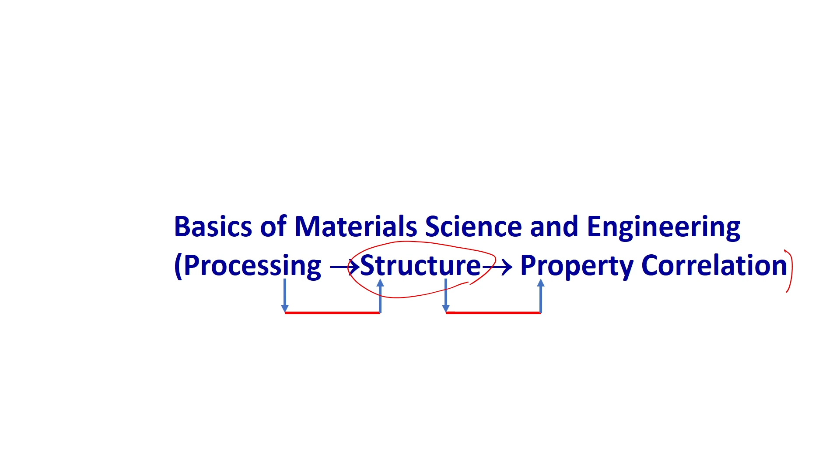So, the basics of material science engineering is this correlation between processing, structure and properties. By processing it means the techniques which you use to make certain material. It can be simply liquid to solid, that is called casting. It can be deformation processing, it can be powder metallurgy, or it can be thin films. Many kinds of processing techniques are available in the literature, and each of these techniques has its own merits and demerits. Based on the processing technique, the microstructure or what you call a structure develops in the material, and this structure is what is important to determine the properties of the material.

So, therefore, we need to understand these connections, and you must be thinking why I am talking of these aspects in a course on machine learning and artificial intelligence. Well, at the end of this course, what you are going to do is to design materials, predict material properties. So, unless you know the basic aspects of those, how can you correlate them? There will be no correlation between the basics of materials engineering and the applications of AI/ML. That is why this needs to be done at the beginning of this course, so that you can actually understand it, and whenever you develop the various kinds of models for machine learning, you will be able to use these kinds of fundamental concepts and models.

So, the fundamental aspect is the correlation between structure and properties, as we have discussed. What is the meaning of structures? Structures can be atomic structures, crystal structures or microstructures. When you see any component which is available in the world, what you see is a macrostructure, how they look. But we can see even microstructures under a microscope. That is why it is called a microstructure. But if you still go down the dimensional scale, you can go to crystals and atomic pieces.

And what are the properties we are going to discuss? Obviously, mechanical properties, the most important, physical, magnetic, electronic, electrical properties. You can expect to get a full understanding of this correlation between the structure and the properties. That is the main objective of these things.

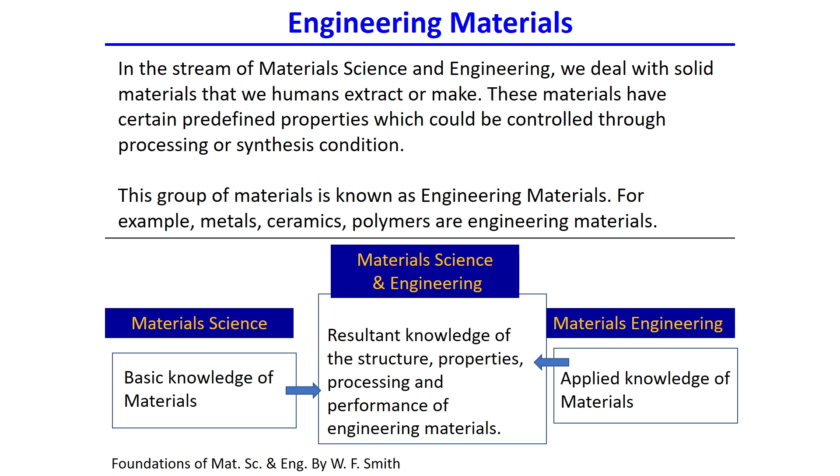Now, this has been done over the last 200 years or so, and most importantly in the last 100 years we saw a lot of engineering aspects come into the picture. So, we have to put it together in one basket, that is the idea. But first and foremost, I told you that in the materials world we have 4 different types: basically metals or alloys, ceramics, polymers and composites. Composites are mixtures of these 3, or of 2 of these 3.

And their chemistries are different, obviously everything is different, properties are different, and some of them have very distinct properties which are not available in other cases. Like in polymers, we have the ability to process very easily, which is the basic characteristic of polymers. That is why you see so many polymeric products in the market today.

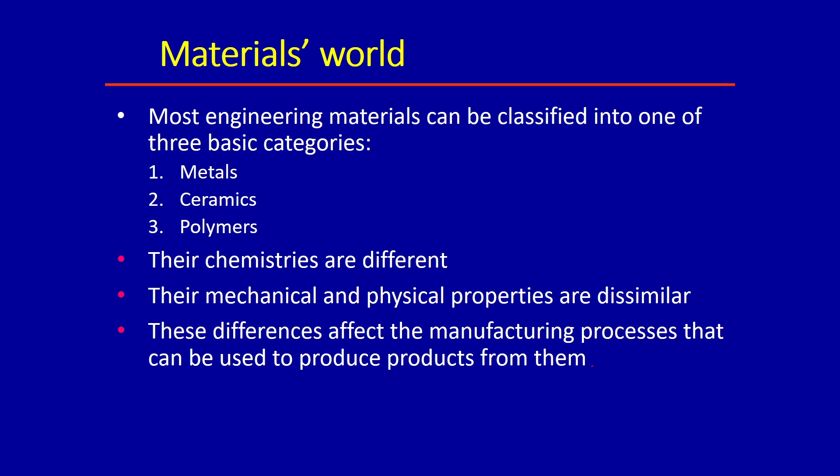But nonetheless, each of these species is very important. As far as the composites are concerned, they are easily available in the world. There are many natural composites available, we know that. The horn of a rhino is a composite, and that is why it is very strong. It is basically a nanocomposite, nanoparticles inside a polymeric material, a biopolymer, that is why it is so strong. And composites can be a mixture of any of these three: metal and ceramics, metal and polymer, and ceramics. We have discussed all of it.

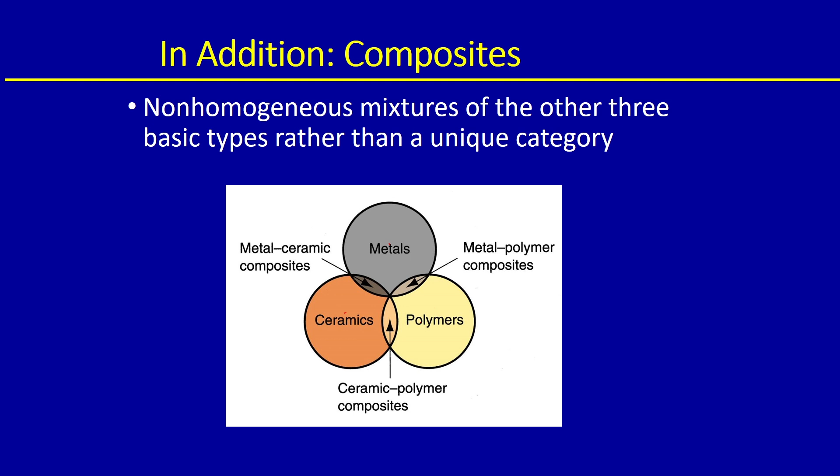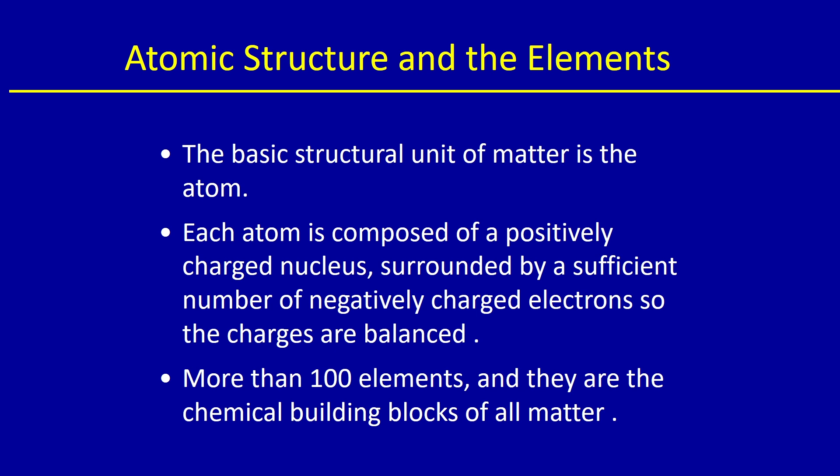So, the basic structure of material is the atom, that is where everything begins. If you want to understand electrical and magnetic properties, we have to go down into electronic structures, which we will see later. But at the beginning, it is important to know that the basic structure of material is the atom, and that is why in a periodic table we divide the elements in a very nice way.

I talked about it. On the left side you have metals, and in the central part you also have metals. You can see on the left side these are the metals, and the central part is also metal. On the right side you basically have metalloids or gases. Metalloids like germanium, silicon, arsenic, antimony, tellurium, bismuth are present on the right side.

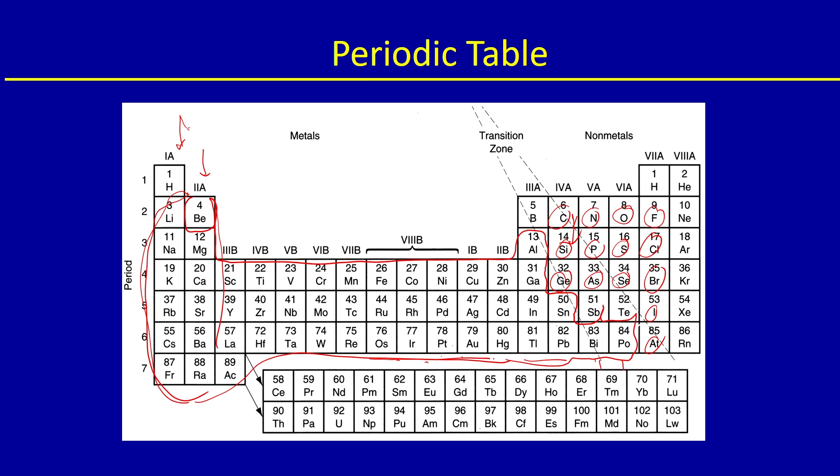And then you have gases like fluorine, chlorine, bromine. Bromine is a liquid, iodine is also present. But we also have oxygen, carbon, nitrogen, boron, phosphorus, sulfur present on the right side of this periodic table. And atoms are the basic building blocks.

Depending on how we arrange them, you can have two types of structures: crystalline and non-crystalline. In a crystalline structure, atoms are arranged in a very orderly manner, and in a non-crystalline structure atoms are arranged in a haphazard or random manner. We will talk about non-crystalline structure later.

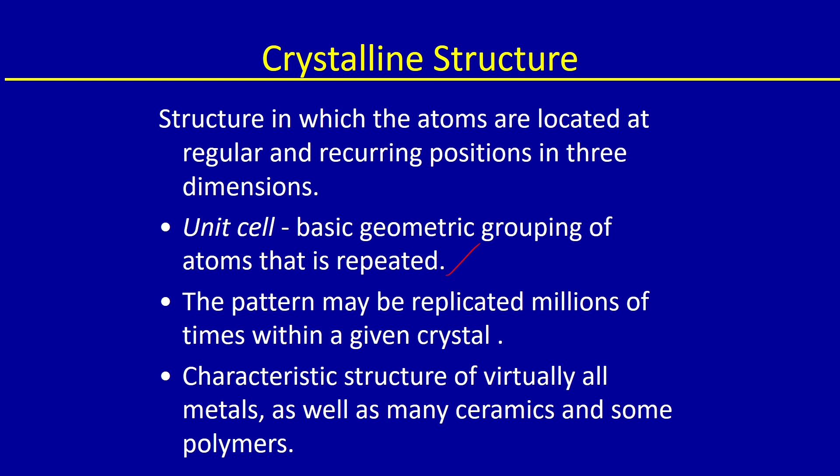So, when your atoms are arranged in a nicely regular recurring way in three-dimensional space, we need to know what is the unit which is getting repeated. That is the basic geometric group, and it is known as a unit cell. We already talked about it, and this pattern can be repeated millions of times in three-dimensional space. That gives you the whole crystal repeatability, and this is true for metals, ceramics, and also some of the polymers.

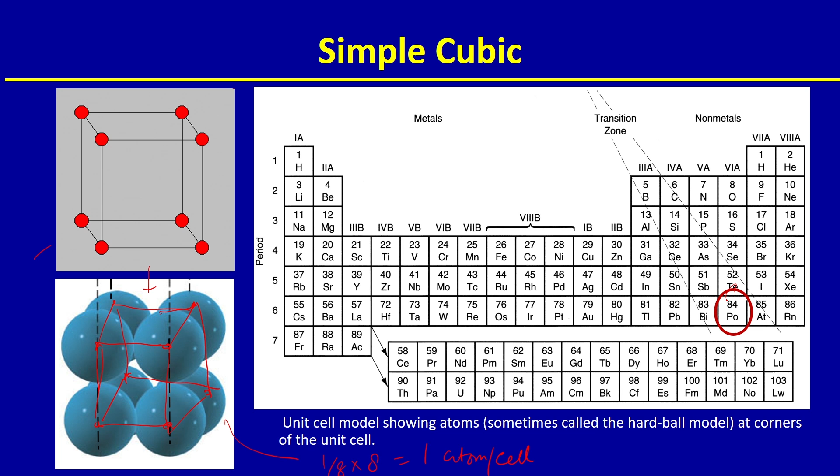The basic structures are divided into four different types. In a cubic system, there is simple cubic, with only one atom at each corner of the cube unit cell, and there is only one metal which shows this structure, called polonium. Then you can also have body centered cubic, face centered cubic, and diamond cubic structures.

Body centered cubic structures have, in addition to the corner atoms, an atom at the center of the unit cell. Face centered cubic structures have atoms at the faces of the unit cell. There are 6 faces, so there are 6 atoms in addition to the atoms at the corners. Diamond cubic is different. It has atoms at the corners of the cube, at the face centers, as well as at the tetrahedral voids within the unit cell.

We already talked about it, like this atom which is at a tetrahedral void. You can easily draw a tetrahedron like this, and within this tetrahedron you have this atom present. You can take away this tetrahedron very easily, and you can see that it forms a hole inside it, and inside it this atom exists. So, silicon, germanium or diamond have diamond cubic structures.

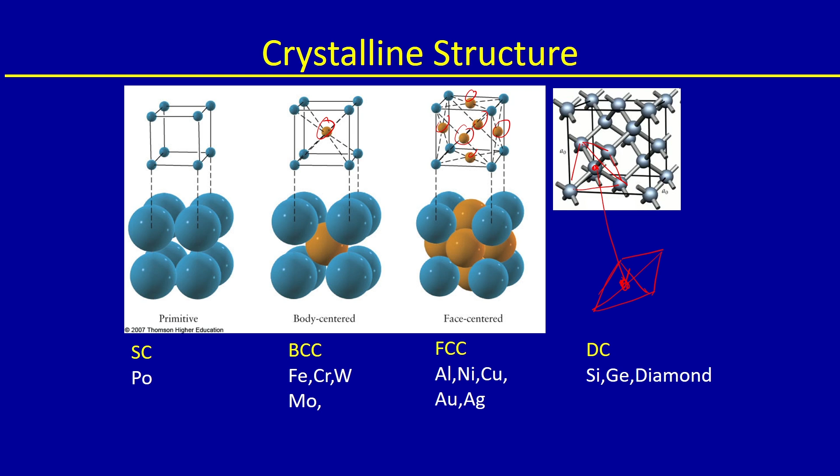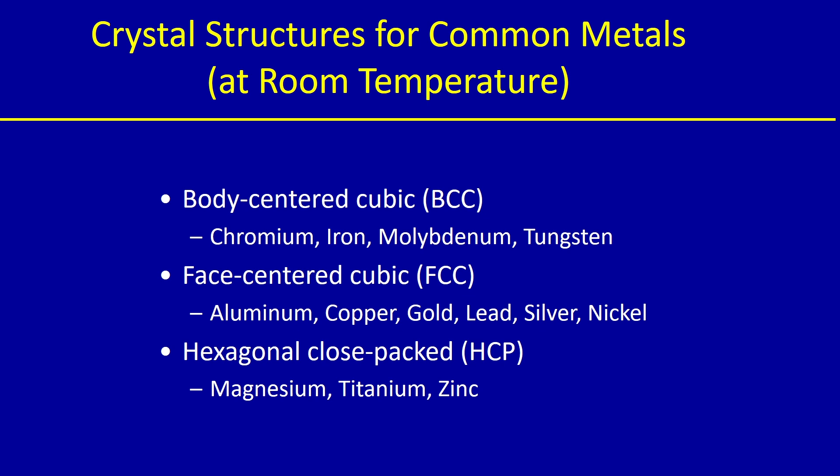You can also have hexagonal structures. Major examples I discussed are magnesium, titanium, zinc, and aluminum oxide, Al2O3, alumina. These are examples of different metals which form these crystal structures. BCC has chromium, iron, molybdenum, tungsten. Face centered cubic has aluminum, copper, and many important metals like gold, lead, silver, nickel. And hexagonal crystal structure is magnesium, titanium, zinc.

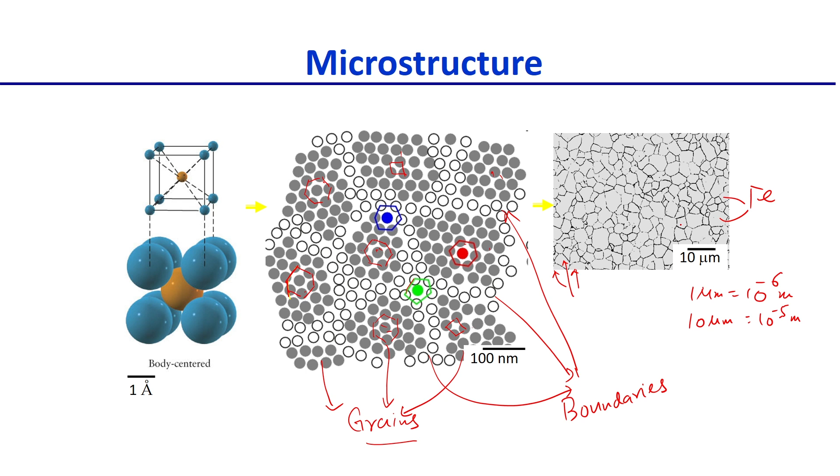So, once you arrange these crystals, you form microstructure. That is what is shown here. These are the different crystals, or they are called grains actually, and between two grains you have boundaries. And in an optical microscope you can see this kind of structure, shown on the right side, with iron grains and the boundaries shown by the lines or curves like that.

So, a microstructure can vary based on pure iron or steels, we know that. Pure iron has no other elements, but steel has about 0.8% or less of carbon, and this can lead to carbide. We basically have a mixture of iron plus carbide. That is why it forms a lamellar structure, consisting of parallel laths of iron and carbide Fe3C.

We always think of crystals as perfect, right, but nothing is perfect in this world, including human beings or us. So imperfection is invariably present in every material, and these imperfections have a very important role in determining the material properties, whether mechanical, physical, thermal, electrical, electronic or magnetic properties. These defects or imperfections will play a role, and imperfections can sometimes be introduced purposefully, or be present because of the processing by which these materials are made.

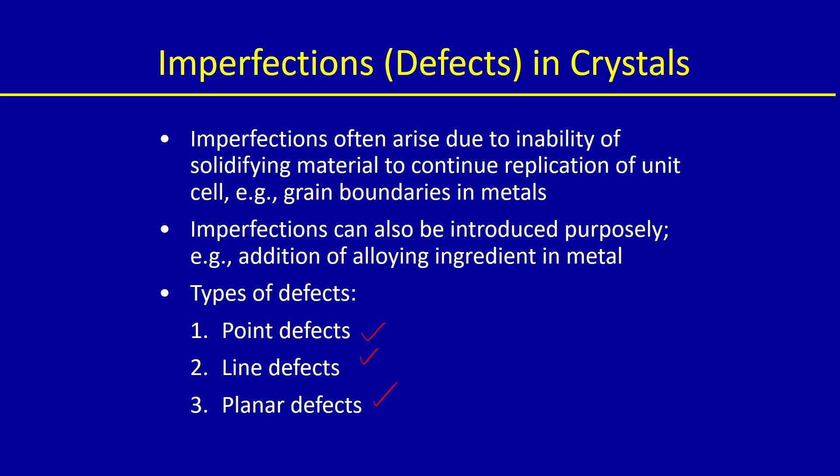So there are different types of imperfections present: point defects, line defects, planar defects. Point defect means one small point, basically an atom or a number of atoms. Line means the defect forms like a line. Planar means a 2D defect. Let us talk about each of them. So the first one is a point defect. By point defect we mean a missing atom or set of atoms which are missing from the structure.

So let us talk about vacancy. The first one is a vacancy. You can see there is a regular arrangement of atoms, but this atom is missing here. So that is basically a vacancy, a vacant site. You can also have many vacancies present in the material.

Surprisingly, vacancies actually increase the stability of the crystal. Therefore vacancies are called equilibrium defects. At any finite temperature there will be a finite number of vacancies present in the material. You cannot avoid them, because they reduce the free energy of the system. How do they reduce it? You can look at a thermodynamics book and understand. I cannot discuss everything, but vacancies are considered equilibrium defects.

Now in crystalline metals you can have vacancies present anywhere, but in ceramics, many of these ceramics have ions present, because bonding is different in ceramics compared to metals, and therefore these ions cannot go away from the crystal or create a vacancy as usual like in metals. Why? Because if an anion is removed, the material will be positively charged. If a cation is removed, it will be vice versa. So in most cases both ions are gone from the system. That is what is seen here.

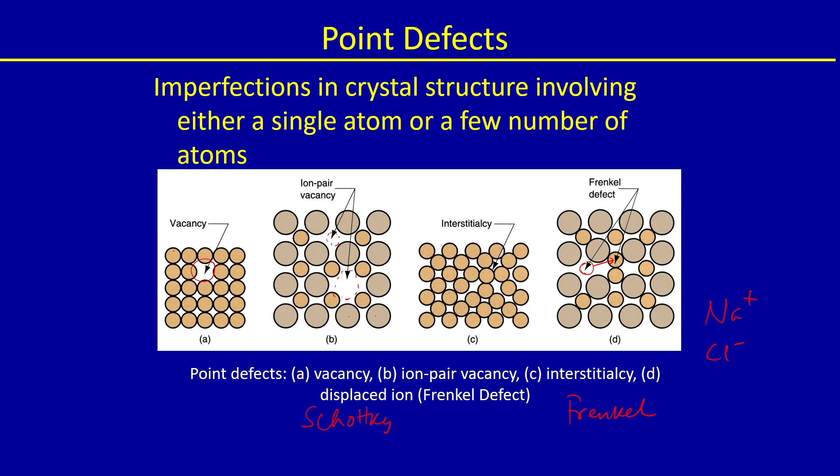Now, you can have also line defects. This is nothing but a connected group of point defects. You have seen point defects is nothing but a missing atom or missing two atoms or atom going from one stable position to interstitial positions. Here in line defects, this group of atoms actually can form a line. They are connected and they can form a line in lattice structure. That is why it is called line defect.

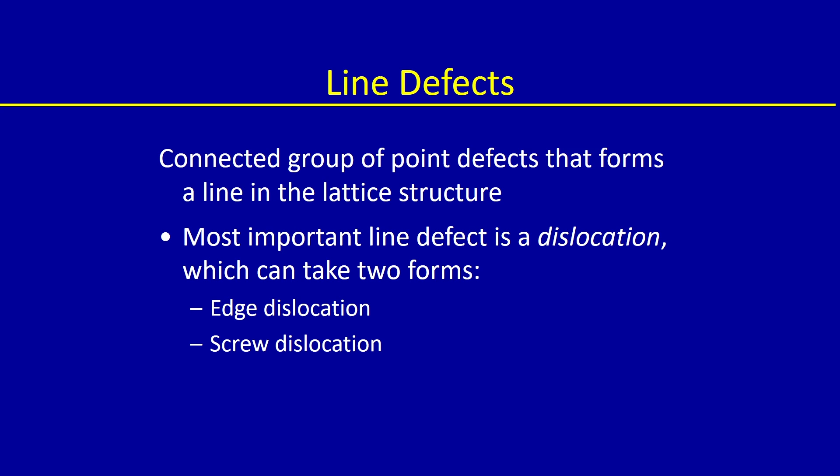Most important line defect is dislocation. We all know dislocation, right? Whenever we go to play football or some game, sometime you can get your joints dislocated, whether joints on the leg or hand, it can get dislocated. Dislocation basically means moving from its original position to some other position, and then you have to go to a doctor to get it set in the actual position. So, dislocation is exactly like that.

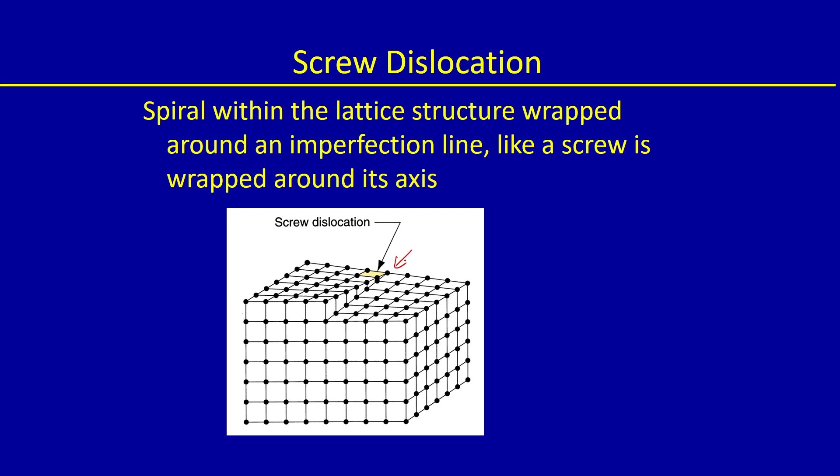So, if you plot the atomic location of the atoms above the plane and below the plane of a dislocation, they look like a screw, and depending on which way you are looking, it will look like a left handed or right handed screw. Here if I look from bottom or from my side, it is looking like a right handed screw. It has a pitch also; every screw has a pitch. So, that is how atoms can be displaced. By simply moving the screw, we can move inside the material. Similarly, we can apply force and the dislocation can move inside the material. Screw dislocations are also widely seen.

In fact, most of the dislocations actually are mixed structure, they are not screw or edge. You can also have planar defects, or what is called an imperfection that can extend in two directions. As you have seen, this was an imperfection which is basically extending in one direction. In fact, this is the best example, the edge dislocation. This is extending along a line, it is not extending along two directions.

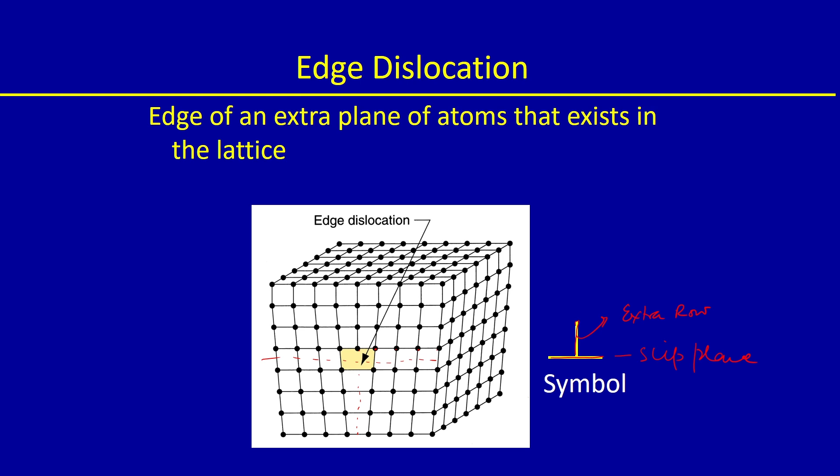Screw is basically along a line, if you draw a line through this, but it is not perfectly like an extended object. But planar defects are actually extended in two directions to form a boundary. That is why it is called a planar defect.

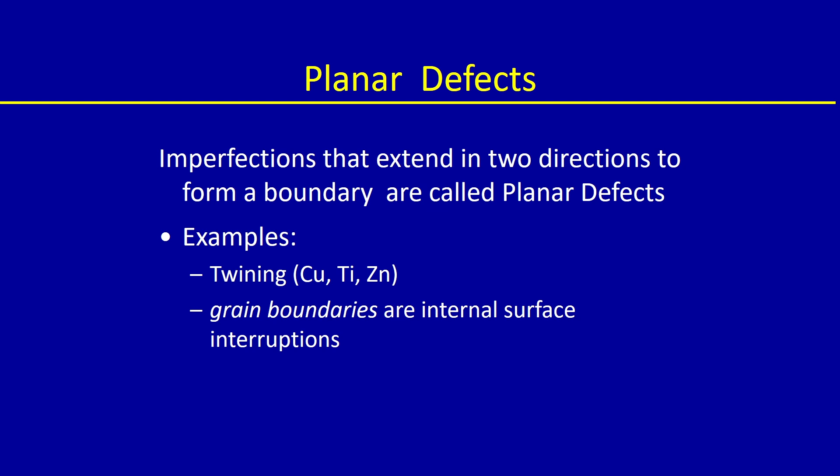Depending on how the atomic structures are following each other, all kinds of grain boundaries can be formed, but the fact is this is a boundary formed by two grains, and this is a planar boundary because this boundary is basically an extension. I will show you later, an extension in the two dimensions x and y.

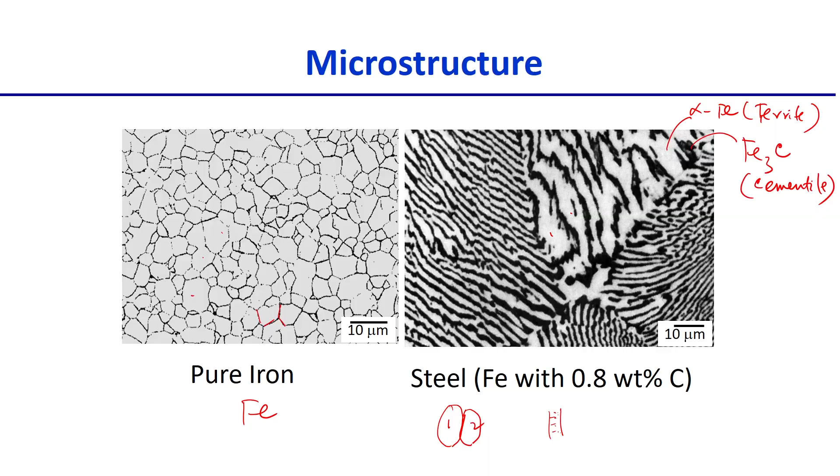So twin leads to extensive deformation, large scale deformation is possible. Unlike dislocation, where only a small region near the dislocation has atoms getting displaced or distorted. Here you have a wide region in which atoms are getting displaced.

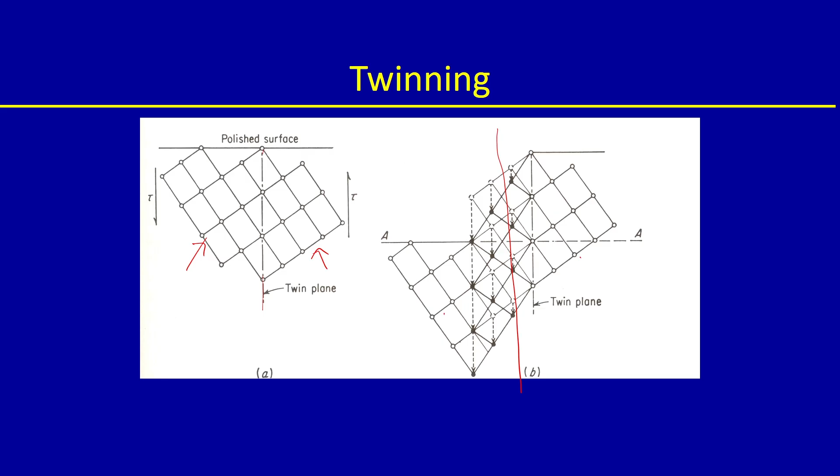That is why twin planes are actually very important, and most HCP metals, hexagonal close packed structure metals like zinc and magnesium, undergo deformation by twinning, and this is very important because if you want to deform a material to give a particular shape, you need to deform it under proper conditions, and that is why twinning is very important.

I know many of you would have already seen this, once you have done lab using different kinds of material like copper. Copper has annealing twins present, or zinc, which is hexagonal close packed structure, can also show all kinds of twins. So let me just wrap this part up.

So by now you know the nature and properties of a material depend on what type of atoms it consists of and how these atoms are arranged inside the material, what is called the internal structure of the material. So one is the chemistry. Chemistry is the type of atoms present in the material. The second one is how they are arranged inside the structure, and the third one obviously you saw is the defect structure.

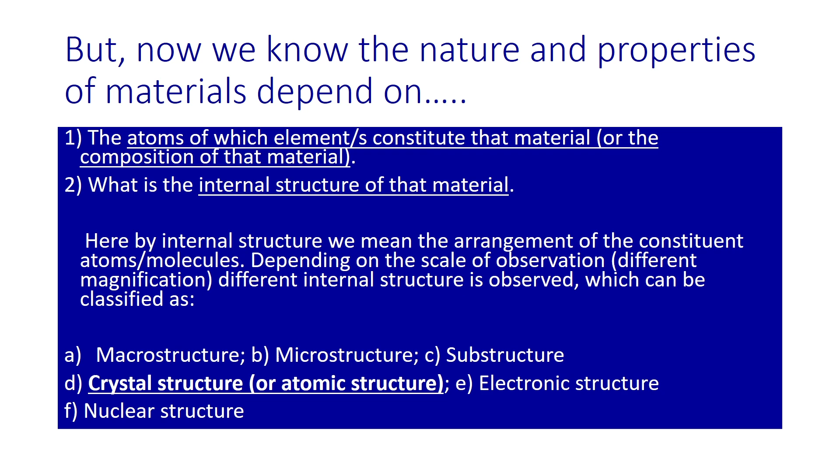So all these things together, obviously you do not need to learn everything. The most important thing you have to learn is how the atoms are distributed, what kind of defect structure is present, and obviously microstructure, grain structure. That is what you need to know very well in order to understand this. So with this we stop the first part of the lecture, and in the next part we will talk more about engineering materials and how they are important.